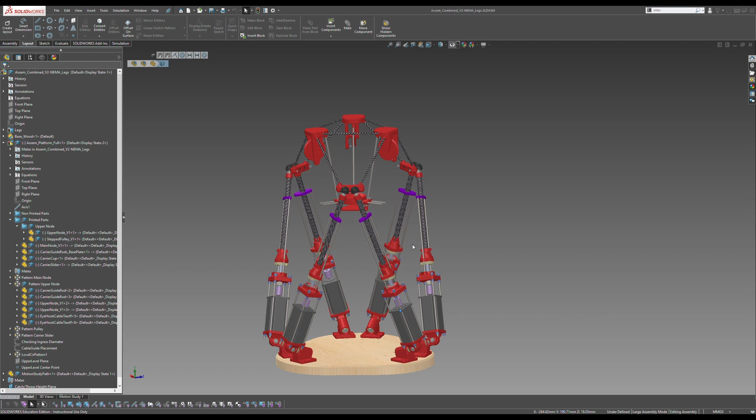In this video, I want to talk about the top part of Jugglebot. So this is the part that actually catches and throws the ball. So here we can see a CAD model of the entirety of Jugglebot, consisting of the 6 legs that make up the Stewart platform of Jugglebot. And I covered these in a very detailed video titled How to Design a Linear Actuator. And in this video, I want to talk about this top part here.

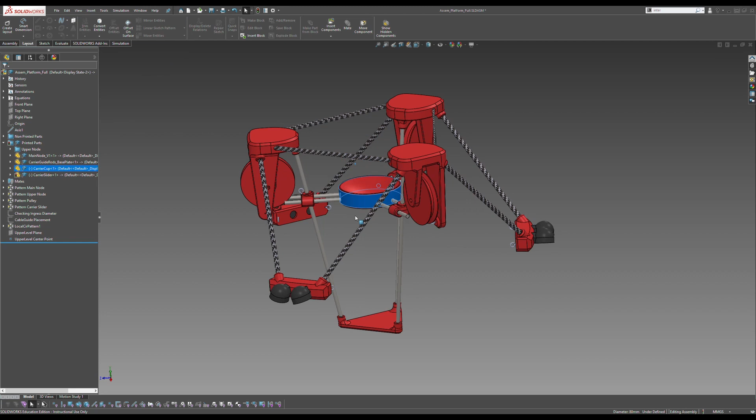So in a close-up, this is what this looks like. And just to recap, this has the objective of catching the ball. So when the ball comes in, it will land in this little cup part. This will slide down, and this whole thing will move around however it needs to orient the ball in space. And then when it's time to throw, this will shoot back up and release the ball.

So now in this video, I want to talk about how I ended up with this design and why everything is shaped the way that it is. Because it might seem a little bit arbitrary, and it is a little bit, but I've been pretty careful with making sure everything is the correct size and shape to not have any interferences. So let's get into it.

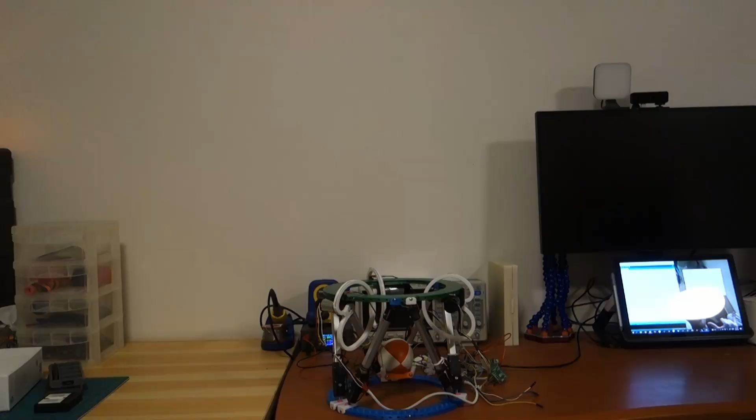Now this is quite good at throwing the ball up, but when it came time to pull this orange part back down again, it had no way of doing that. It was just relying on gravity to pull it down. And I wasn't too happy with that. That didn't seem like a reliable way to bring the hand back down again.

So what I wanted to do instead to improve upon this is to have some way to actively pull, in this case the orange part, back down again so that we can have a fully defined motion throughout the entire path of the ball being held. This might seem relatively easy, we just need some way to pull this back down again. But unfortunately, it's not as easy as it seems, and I could not think of a nice, small, compact way to do this. And that's where this whole big frame thing comes in.

When I was trying to figure out ways to do this, I came up with a whole bunch of different ideas. For example, having a string that attaches to the bottom of this cup part and then attaches to a motor on the ground or to a spring or something like that, and that can keep a constant tension pulling this down. But I'm not convinced that that would work, because once this platform moves off on some angle, then the string is not going to be pulling the cup in the correct direction.

I need to make sure that this cup part is pulled perfectly orthogonal to this platform, which means that if the platform is here, I need the cup to be pulled straight down. If the platform is here, I need the cup to be pulled out at this angle here. And that's a little bit easier said than done.

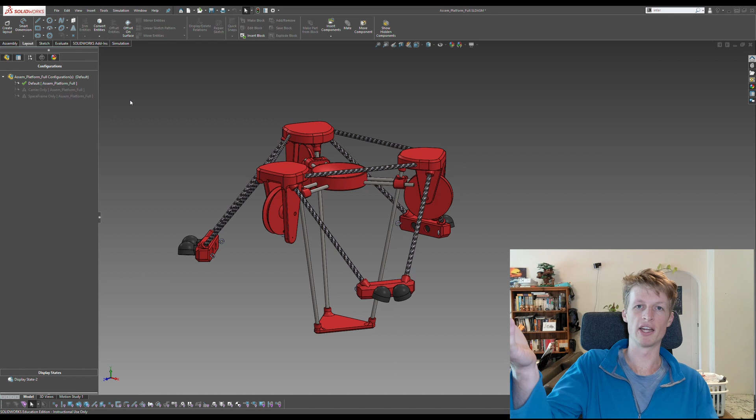So at the end of the day, all we really need to be able to throw the ball up and then pull the carrier part back down again is this section here. This part just has the cup on the rails, and it can slide up and down, and that's all that we really need, with just a spring or something to pull this part back down to here, and done. That's it. So I should, in theory, be able to just attach that directly to the Stewart platform part and be away with it.

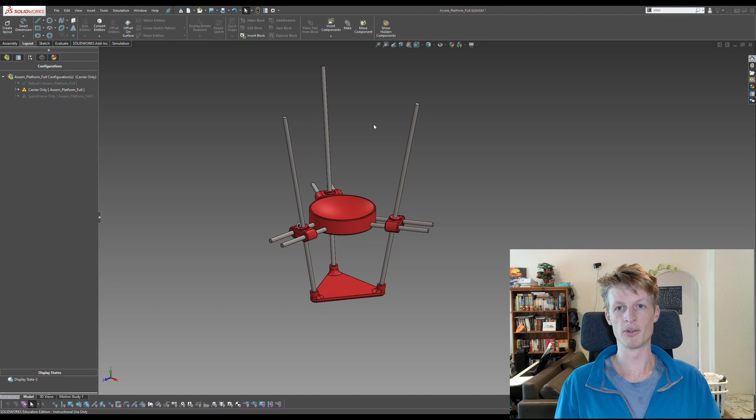So you might be wondering why I have this whole frame structure around it, and particularly why this level up here is elevated from down here. Well, the reason for that is because when this is down the bottom, these rods stick out quite a lot, and this whole structure is quite large. And so when this is inside the Stewart platform, it can very easily lead to collisions with the legs of the Stewart platform.

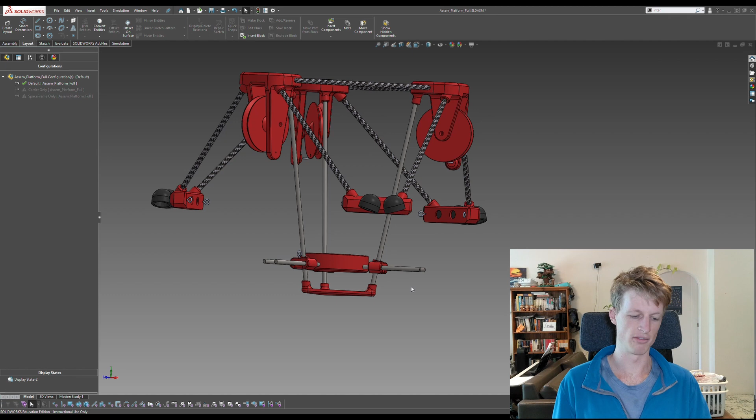To help me design around this and to visualize what's going on, I made a low poly model of what's going on here, and this way I can move everything around and see when collisions occur, and test different dimensions and test everything out.

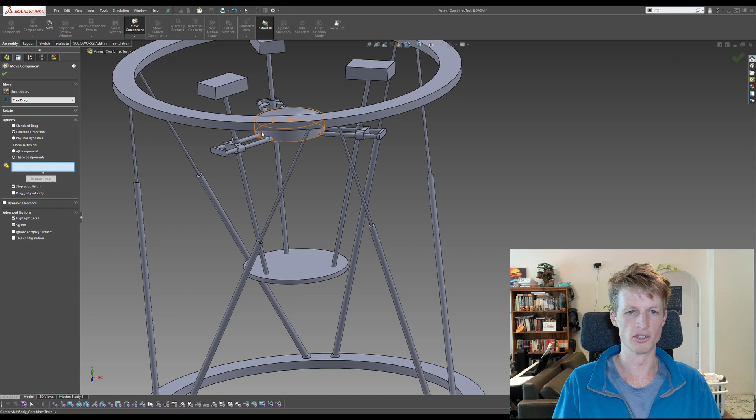For anyone using Solidworks, a really helpful way to do this is in the assembly menu. You can go into move component, and you can actually have a collision detection setting. So you can select all of the components that you want to check. So let's say I want to check all of these. Then I can click resume drag, and I can drag this around, and as soon as something collides, the model will stop moving, and it'll highlight the parts that have collided with each other. This is really, really helpful for testing these sorts of models and seeing what geometries work.

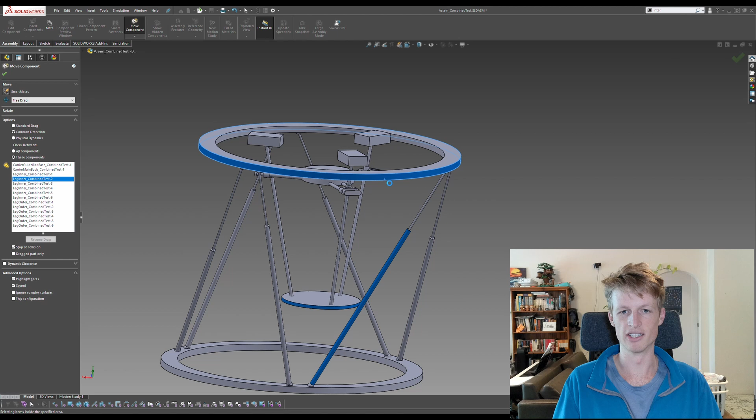And so here we can see pretty clearly that this geometry is not going to be able to achieve very much because they collide with very little movement. So what I can do is I can go in this model, I can change the position of the top part. So let's say I can make it a little bit higher up. So now it's up there. And then I can do the same thing. And so we can see now with this new design where the top part has been elevated, this can now move quite a bit more freely without any collisions.

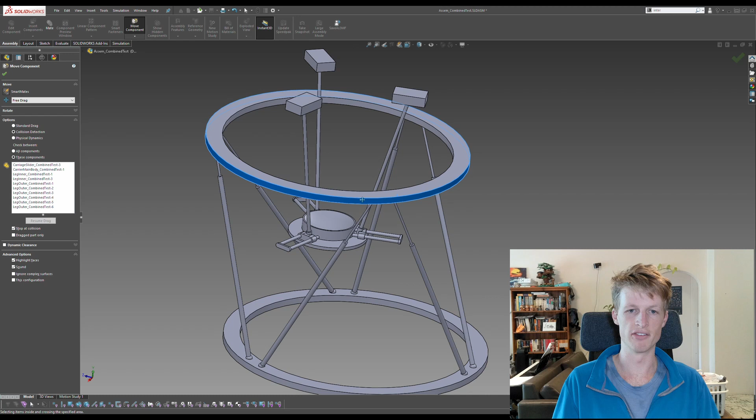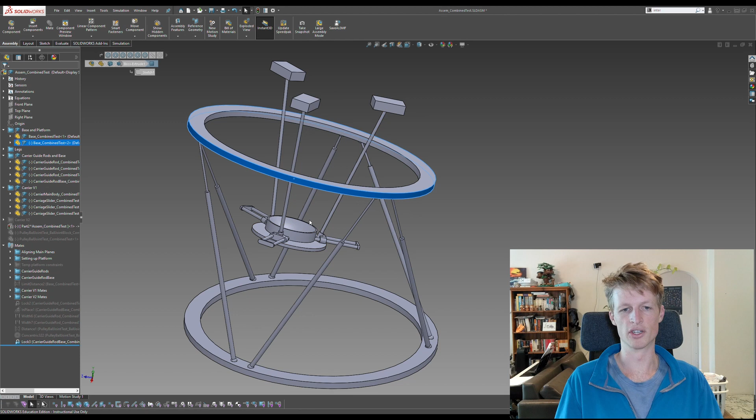It can take a little while to triple check that you've actually covered all cases because it's a little bit tedious to swap between rotating and moving the different components. But once you get familiar with it, it's not too slow and you can get through it pretty quickly. So after working through this, I figured out what geometry I needed and how high I needed this upper part to be from the platform so that there were no collisions between any of these rods or pieces down here with any of the legs. And with that, I was good to go.

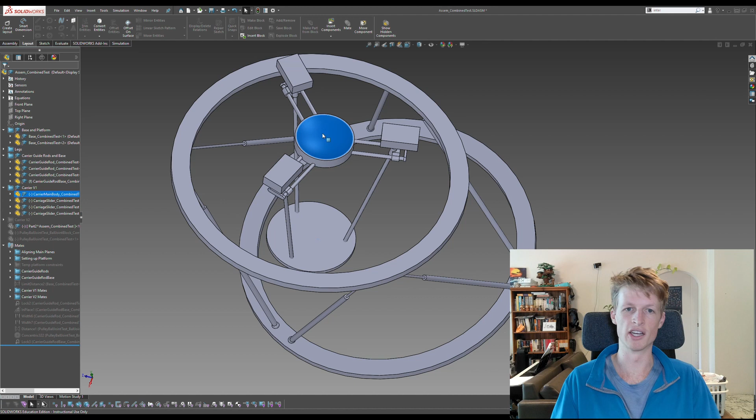Before we go any further, I just want to preemptively address a question that you might be having, which is why don't I make this space up here larger? Which is to say that I can just have a larger area that the ball can potentially fall into and not collide with any of the other parts. And the reason for that is because the larger that this top section is, the further apart these three guide rods need to be. And what that means is that these rods here would need to be even longer than they are now. So for example, if this block that supports this guide rod was all the way out here, then these two rods over here would need to be out to about here also.

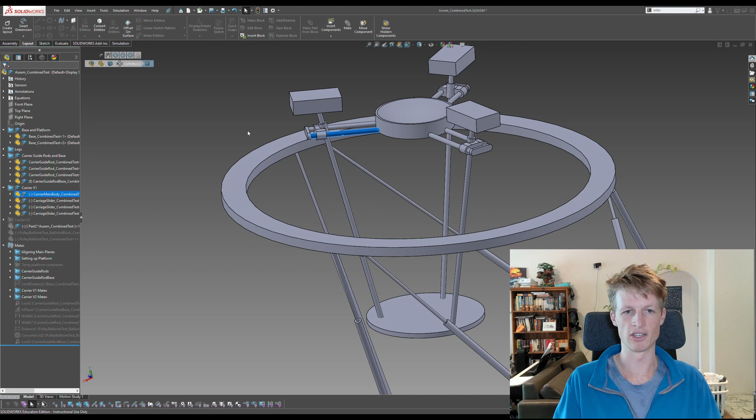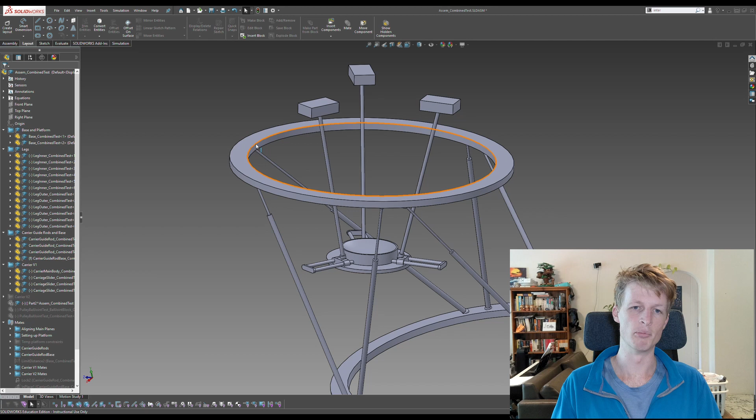They would need to be quite a bit longer than they are now, which is fine, except for when this moves down, these rods are now sticking out really far and are very prone to colliding with the legs because it's just so many rods in such a small amount of space. So that is why this is the size that it is. It would be nice if I could make it a lot bigger and have a larger catchment area, but I couldn't think of a good way to do that. So this is what it is right now. I think that this should still be fine as it is. But if I find that I need a larger catchment area to account for errors, then I'll cross that bridge when I come to it.

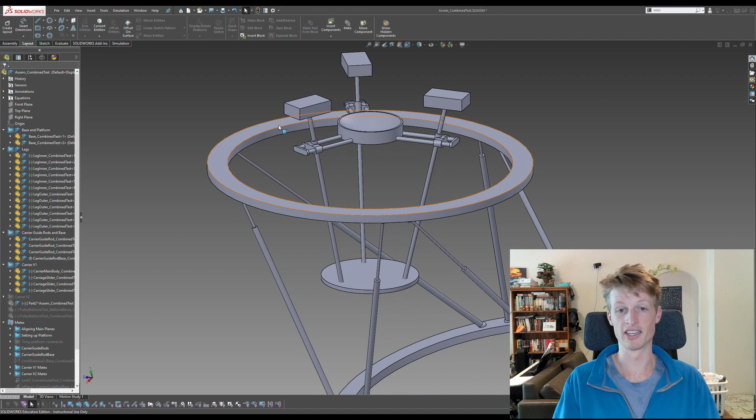So working through both of these design considerations, being the height of the top part, and the second consideration being the catchment area that I just talked about, led me to this design that you saw before. So that describes the geometry of this space frame part with all of these carbon fiber tubes. And now I want to go on to these pulleys and what they are doing.

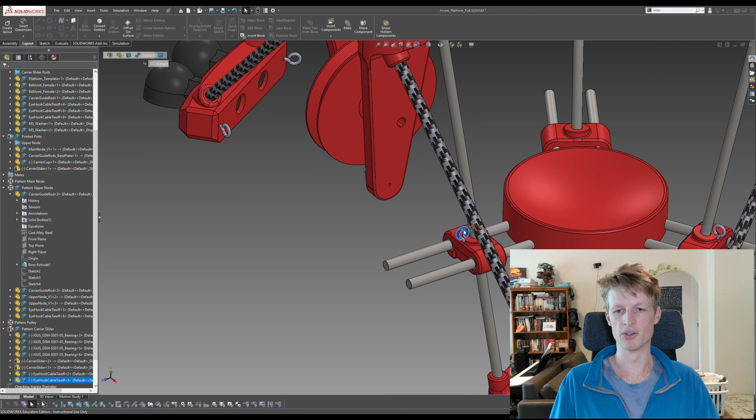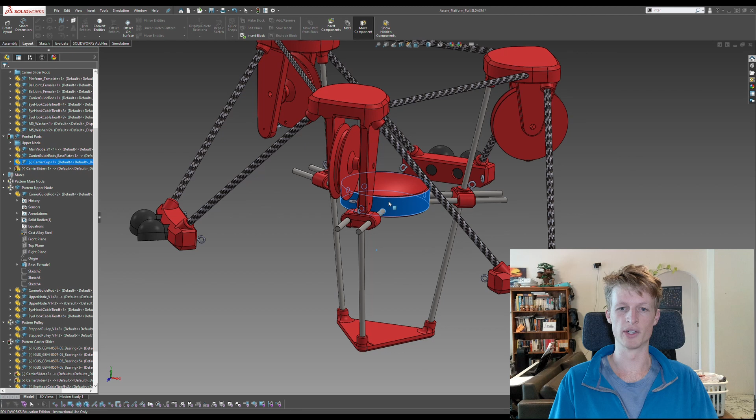Briefly, there will be a cable that will come from this hook here and wrap over this large pulley. And then on the smaller side of the pulley, there'll be a cable that will go down to a motor on the ground. The reason why this pulley is stepped like this, I covered in an earlier video, and I'll put a link to that on the screen now in case you're interested. But the TLDR is basically just for mechanical advantage, to make sure that this slider can move really quickly even when the platform itself is not.

What I want to cover now though is this little hook in here, because it serves a pretty important role. It ensures that even when the platform is up at some angle like this, the cable that goes from the motor down on the ground up to this pulley is routed nicely over this pulley so that it will coil properly.

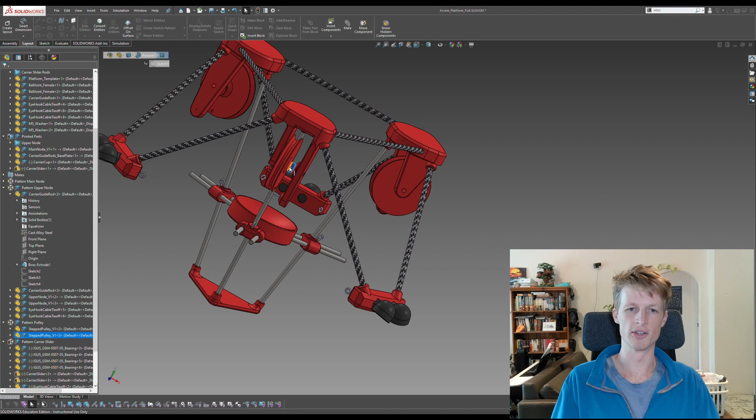If I didn't have this guide hook here, then what would happen is when the platform is off on an angle, the cable will just run straight from this pulley and then it will try to go straight down to the motor and it will rub on this other pulley or somewhere else and it will just not coil nicely. So this hook, in theory, should stop that from happening and should allow it to coil nicely.

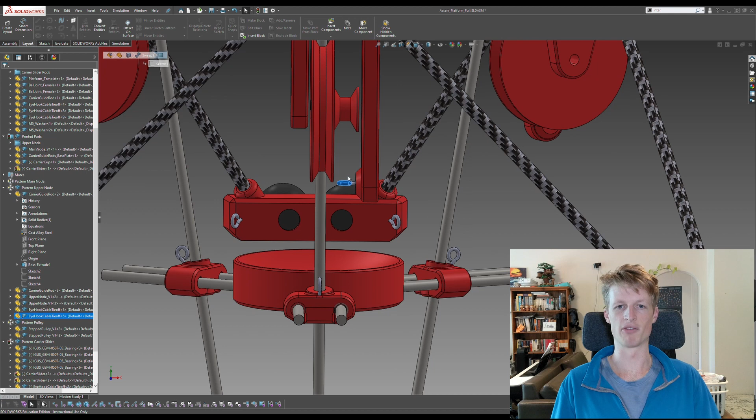As for the rest of the structure, it's relatively straightforward, to be honest. These carbon fiber rods just push into the printed parts and they are very, very solidly in there. I don't think I'll be able to pull them out anytime soon.

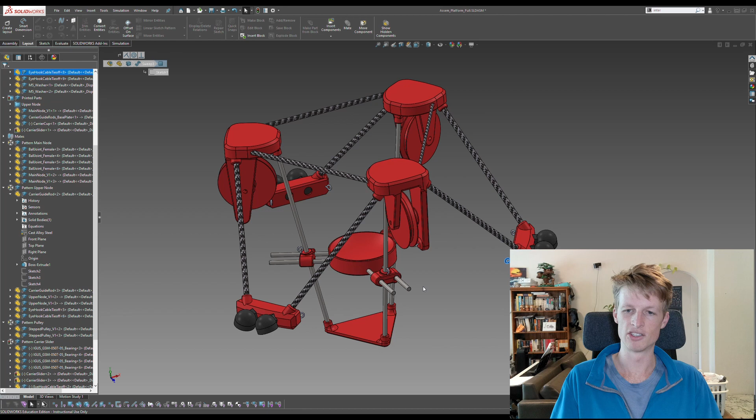These hooks down here are for strings to attach. I put them there just in case the rigidity of the space frame is not enough on its own to withstand the forces involved, and in case everything started to flex out a little bit. So if I do notice that when I'm using this that these parts tend to flex out from each other, then I'll put some strings in here to tie the two sections together and hold them all nice and tight.

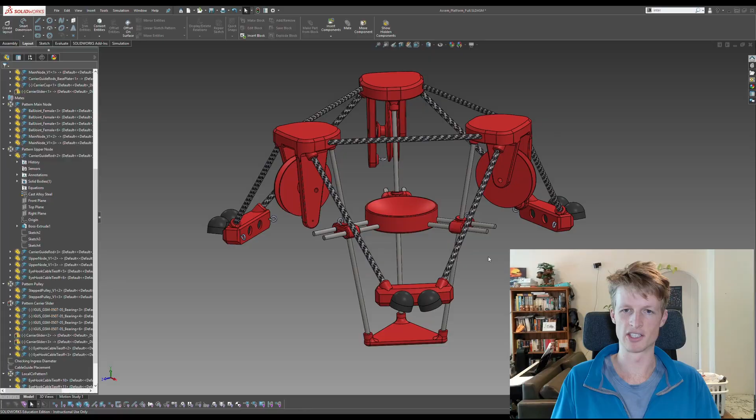There is one thing that I'm missing on this CAD model though, and that is the mechanism to return this back down again, which is the whole point of this structure, is to help this return back down. I am planning on using some constant force springs, but I just haven't had time yet to include them in this model and to actually test that idea out. So I'll hopefully be doing that sometime soon. So that's the theory of what this design is.

And now we can actually look at it in practice, because over the last couple of weeks, I've been printing all of the parts for this and putting it all together. And in my opinion, it looks pretty nice. But there's a pretty big problem with it, which is that as it is right now, this carrier sticks quite a lot on the rods when it's sliding up and down.

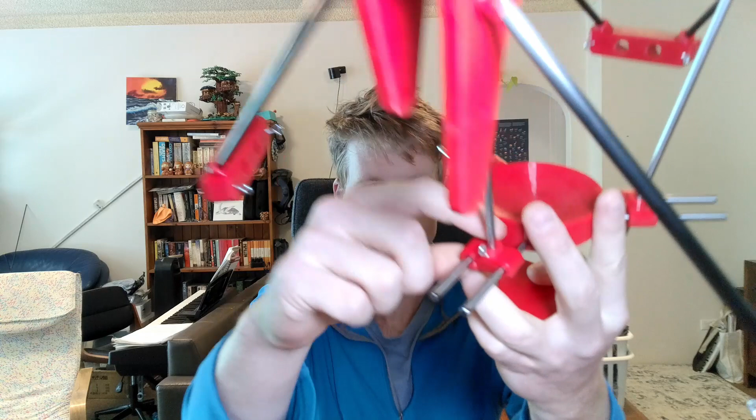Now, I don't have any bearings in these joints in here. It's just the 3D printed part against the metal. So having bearings on there would absolutely solve the problem. But bearings are quite large, and I don't really want to put 9 of them on here, because that size and weight is just going to make this whole thing a lot more bulky, and I want to try to avoid that if possible.

What I have noticed though, in just playing around with this, is that if I push these 3 carriers in, then the whole thing slides up quite smoothly and back down again. It's just a little bit awkward to hold. So I think that once I add in those constant force springs or other springs, hopefully that will fix this problem. I'm not fully convinced that it will though, and any amount of sticking on these rods is honestly going to be too much. This needs to slide very, very smoothly to receive and throw the ball in a smooth manner. So I'll have to see how this goes.

As for the rigidity though, this is very, very solid. It's a super, super solid frame, and it's quite light given how big it is. So I'm very happy with how the space frame side of this worked, but I'm a little bit less convinced about the actual catching and throwing bit. So we'll see. So that should hopefully give you a pretty good idea of what this component is doing and why it is the way that it is.

And if you have any ideas about any of this, then please let me know. Particularly if you have any ideas of how to stop this binding motion where it's getting stuck. I would love to hear. This is sort of irking me, and I would love if I could fix this.